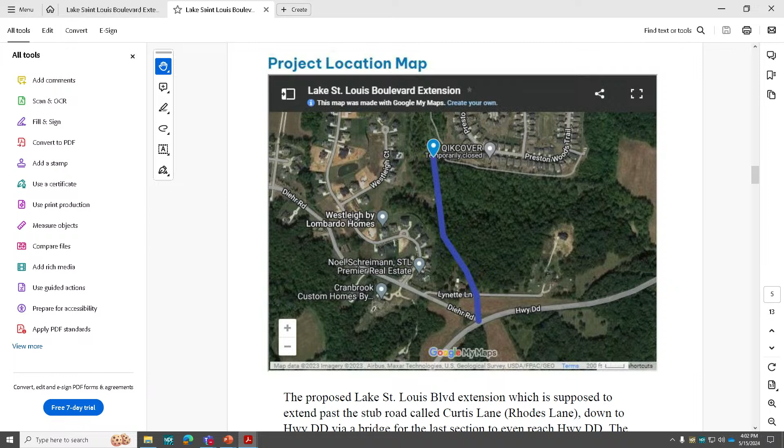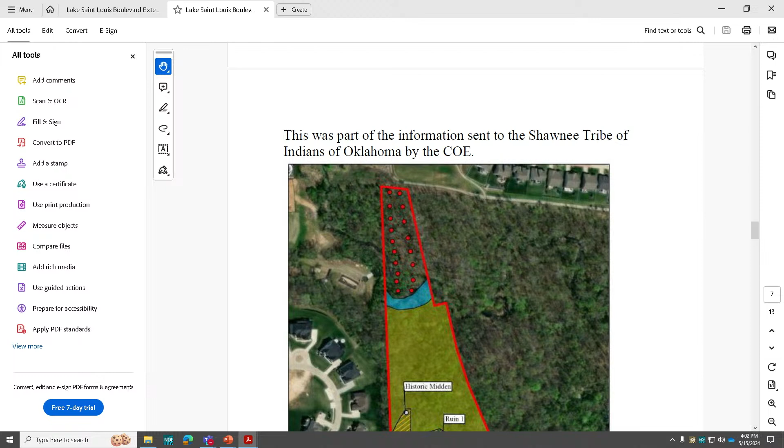I actually went to the Corps of Engineers and got some of their information about permits, which they haven't seen yet from the county. This is the original route, not the one that's supposed to be taken now. That's changed and moved over to Preston Woods even more. There's one I really want you to see - this is what the Corps sent. Do we have a copy of this? I can give you a copy. So this is what the Corps of Engineers actually sent to multiple Indian tribes. It shows on this drawing that there's historic buildings still on there, and other items.

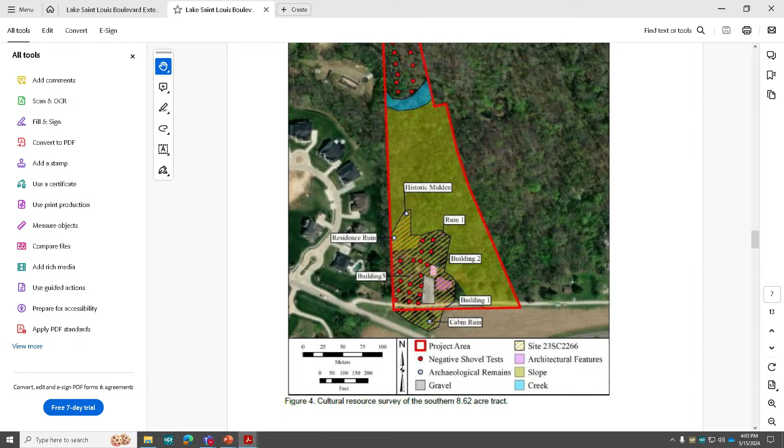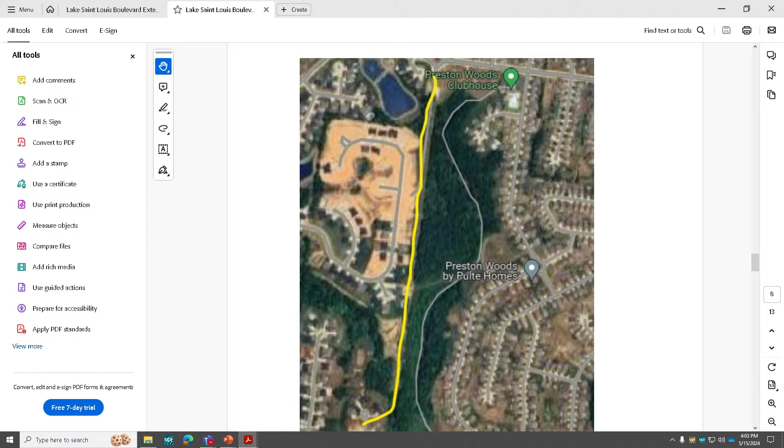That's the original route, using Curtis Lane, going down off of Paul Renaud. And even in between that lane, there's property that belongs to Preston Woods on the left side and on the east side - so east and west side, that property belongs to Preston Woods. This just shows you what I was talking about, where Curtis Lane originally was and where they're planning on putting the road, taking property away from the owner who is off Lynette Lane, off of Diehr Road.

When I get verification of the Eagles, I will let you guys know. Some things that the residents want you to know is that if they're going to do it, go ahead and do it, but they want trees to be replaced. Keep it as natural as it is now - it doesn't get mowed, it's not grass and sod put down, it's all natural, and so they want to keep that.

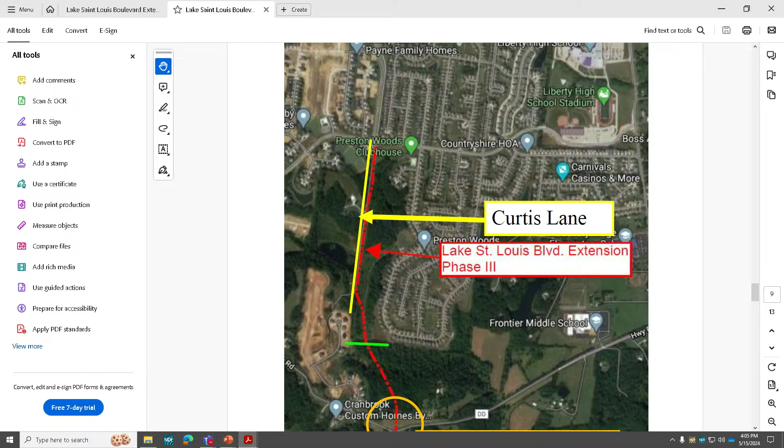Am I past time? Yep. Oh, sorry. So, have you talked to Lake St. Louis, and what are they saying? It's O'Fallon. Oh, I'm sorry, I thought you meant Lake St. Louis. That's okay. Yes, it's O'Fallon from Preston Woods, but when you get down to the bottom of Preston Wood where that green line is, that's St. Charles County, with the bridge going over a wetland and destroying the habitat that all these people paid for. Okay, any questions? Thank you very much. Thank you.

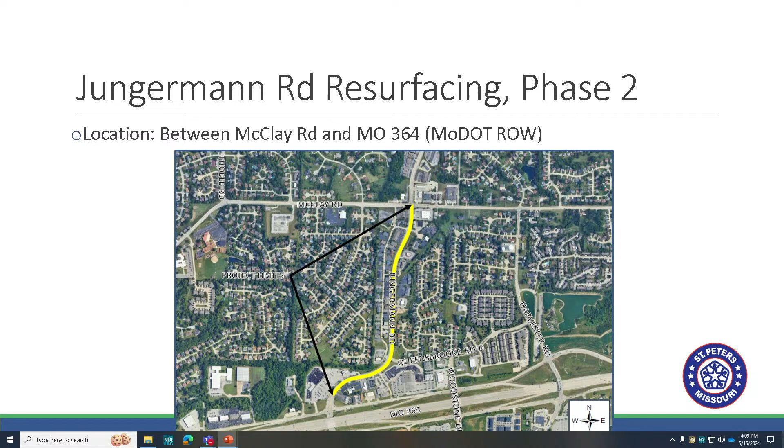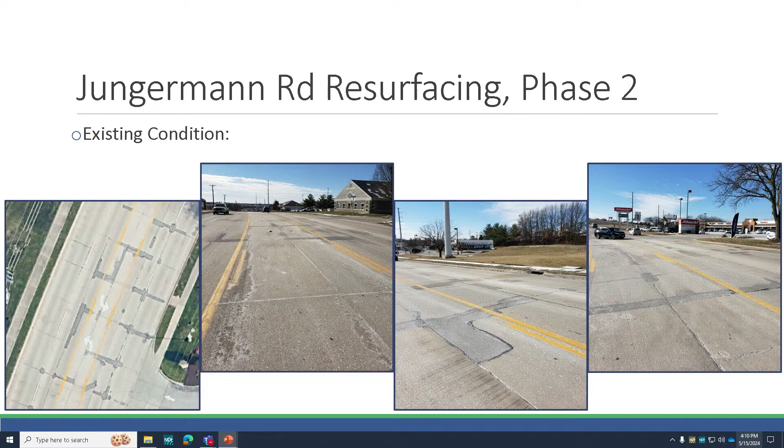The existing condition is basically, the city went in a few years back and did a large amount of partial depth pavement repair on the joints, just to get us by until we were able to come back to East West Gateway and apply for funding to do a larger project. So a lot of that joint repair is starting to fail. We've got some additional cracking in the slabs. The sidewalk is failing in multiple locations, with a lot of trip hazards. It doesn't meet ADA compliance. So those are things we want to address with this project.

The project scope: remove and replace all the damaged roadway slabs, diamond grind the roadway surface when we're finished to make it nice and smooth. We'll replace all the pavement marking and then install inlaid pavement markers. Remove and replace all the sidewalk, and then upgrade the pedestrian crossings at the signalized intersections, which would be Queensbrook and McClay.

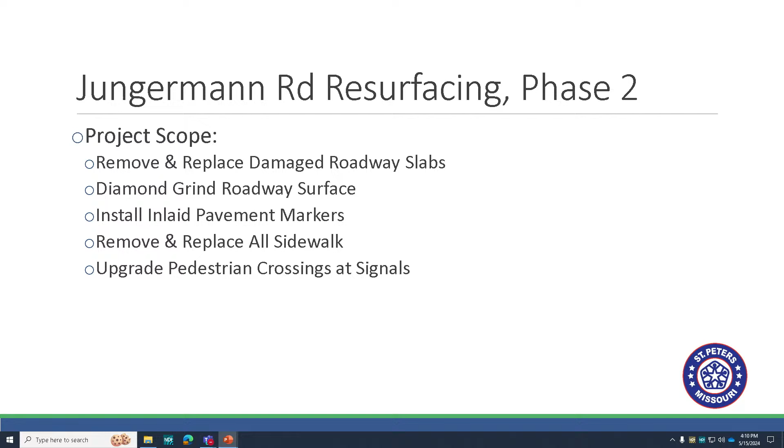Basically, we want to extend the useful life of the roadway, provide a nice smooth driving surface, improve the visibility of those lane lines during nighttime and wet conditions with the inlaid pavement markers. And then when we're finished, provide an ADA compliant path for bicyclists and pedestrians at the signalized crossings and throughout. So it's our standard resurfacing project that we typically do.

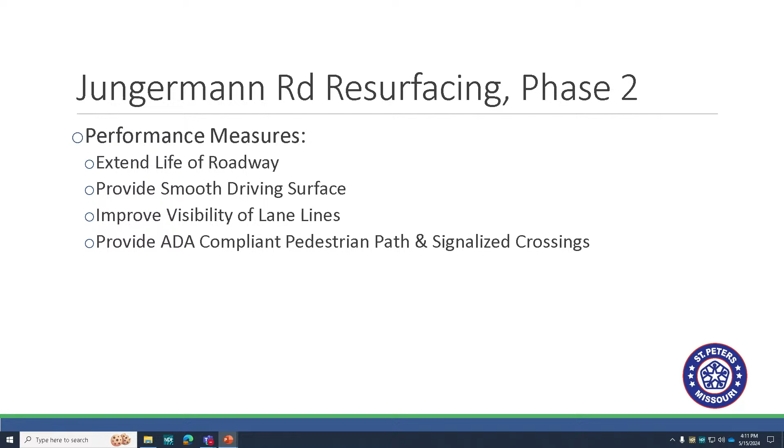Our second project is the Spencer Road Multi-Use Path Phase 1. This project is located along Mexico Road. It's going to start down at City Centre Park and extend up along the creek, along the north side of Mexico Road. It'll tie into a little piece of path that the city's Parks Department has already installed. Then on the north end of where they've stopped, we'll cross a creek, continue along the creek to the north, and then go along the south side of Executive Centre Parkway over to the Spencer Road intersection.

The existing condition of the path we have out there today, it's right there against traffic. It goes through one of our busier intersections in the city, the Spencer and Mexico intersection. So somebody on a bike or walking has to traverse that intersection, and that could be a safety issue. The idea is we can move those folks out of traffic, away from traffic, along a much nicer, more peaceful, less stressful route.

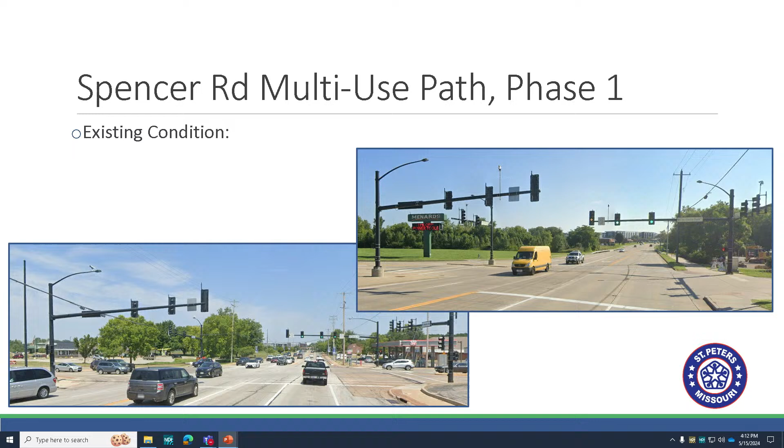Project scope is to install a new multi-use path, basically relocating the alignment of our existing Spencer Creek path, which will eventually become the Centennial Greenway. So once we complete multiple phases of upgrading this path, GRG is going to designate this as the Centennial Greenway. So this is one step in that direction. We'll upgrade the pedestrian crossings at the signals.

When you get to the bridge, yeah, I'll go back. Oh no, oh shoot, sorry, I was trying to go backwards and I'm just going forwards. Let me get there. Up on the, I don't know if you guys can see this. Oh no, I'm technologically challenged, guys. I'm sorry, this is not my, there we go.

Sorry, I was trying to point out to you, but up along Executive Centre Parkway, where there's a bridge for the creek crossing, instead of widening the bridge, we got a little creative. We're going to move the bridge barrier that exists over a few feet to widen our pedestrian path so that we don't have to widen the bridge. So a huge cost savings.

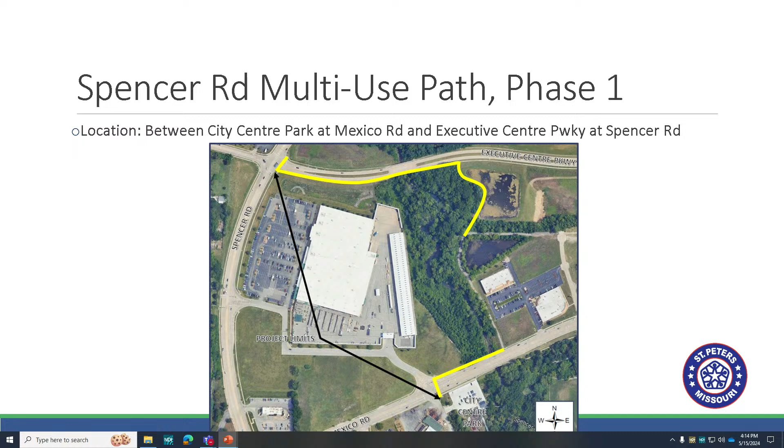Relocate that barrier, and then once we're finished with that, we'll put an epoxy polymer overlay across the bridge deck to fill in any of the divots and damage that might be created from removing that bridge barrier. And then also across the rest of the bridge deck to create a nice uniform surface and seal up any cracks that we have. And then replace the guardrail to bring it all up to current standards.

So the overall goal is to improve bike pedestrian safety. Again, move them away from traffic, get them out of the traveled way for vehicles as much as we can. Provide an ADA compliant bike ped path, and on the signalized crossings, provide a compliant path. Improve the visibility of the crosswalks. We'll put in the high-vis crosswalks, the big blocks, to try to bring more attention to those areas where a lot of bikes and pedestrians will be. And then extend the useful life of the deck of the bridge, create that uniform path surface, and provide compliant guardrail.

The overall project cost is $1.6 million. We only asked for 75% from East West Gateway because we were able to receive a TAP grant, which can only be used for bike ped improvements, and we wanted to add a couple of maintenance items to the project, so we were only able to get 75% federal funding, and we're asking for 80% of the local match, which is 20% of the project.

Did you secure that funding also? We did, yep. Congratulations, that's good.

And then the last project is the Mid-Rivers Mall Drive multi-use path. We've talked about this one a few times before, but it's located between Route N and MoDOT's right-of-way at 364, along the east side of the roadway.

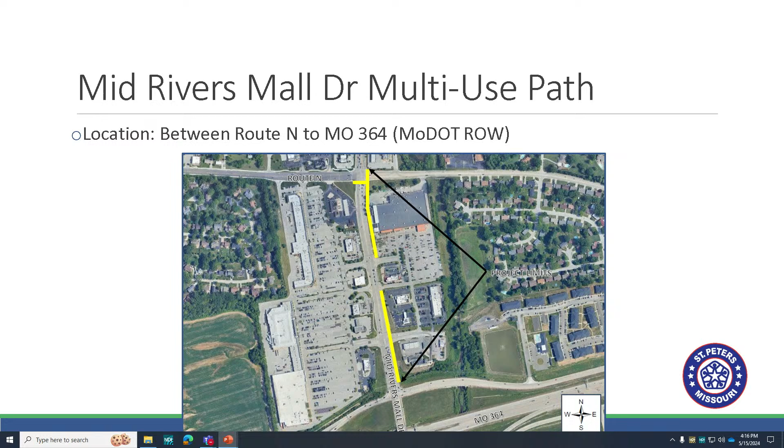Existing condition is it's not ADA compliant. We've got many curb ramps that aren't compliant. Push buttons aren't in the right locations to be ADA compliant. We've got some sump grates that create trip hazards because they're set back, and somebody could easily fall into the sump. Cross slopes are not meeting compliance. You can see they're gathering debris because they're kind of tilted.

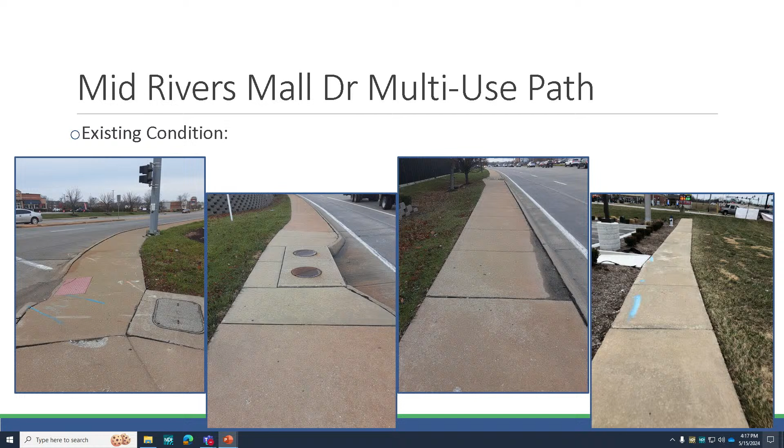And then on the south end of the project, down by Applebee's, the sidewalk just ends and there's a gap. So if somebody travels all the way down there, say, in a wheelchair, they're going to have to turn all the way back around, go back to the signal and back around. So it's really not safe for anyone.

So we would remove and replace the sidewalk with a 10-foot wide multi-use path, relocate any conflicting signal equipment at the Home Depot intersection, and at the Route N intersection there may be equipment that needs to be relocated. Relocate any conflicting utilities in the way, handholes, utility poles, and overall upgrade the pedestrian crossings at the signals. We would put in the high visibility crosswalk blocks also.

And this project will connect some adjoining paths. City of Cottleville has a path that runs along Route N. MoDOT has one that crosses over their bridge at 364, and it goes down to the south to the county park. This will kind of connect those dots.

We have an existing 8-foot path, if you want to call it that, on the west side of the road. It's not really a path, it's a shoulder. So people are kind of right there with traffic. Again, we want to get them away from traffic.

So we would improve the safety for bicyclists and pedestrians, provide a continuous path, get rid of that gap down by Applebee's, and then provide an ADA compliant path at the signalized crosswalks. Improve visibility of the crosswalks again with the high-vis crosswalk marking, and then connect to all those adjoining paths in the area.

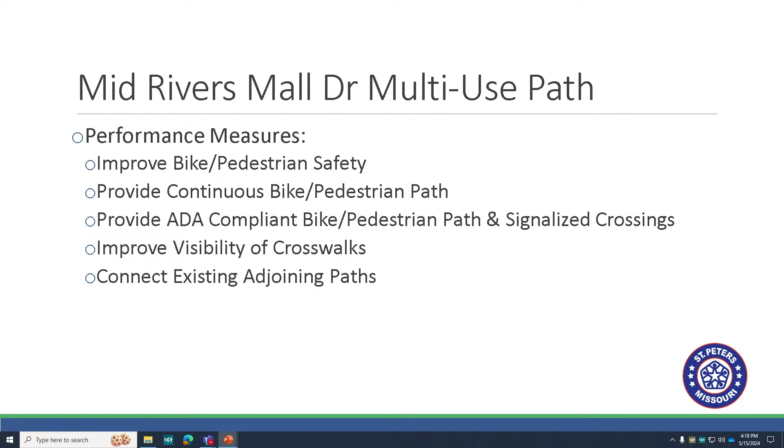We were successful in getting federal funding for this as well. Overall the project is pretty cheap, $800,000.

On the map, you can see there's that gap in front of Chick-fil-A, which the county has already funded through the right turn lane project into the Home Depot development. With that project, we're going to go ahead and install the path in that stretch, with city funding. So this does not include that little gap there, so it's $800,000.

We only asked for 65% federal funding, and we were able to receive that. We were trying to maximize our score to make sure that we got the project, so we were trying to keep our costs as low as possible, our federal ask as low as possible. So we're asking for an 80% local match, with county contribution for 28% of the project.

And then our priorities are Jungerman, Spencer, and Mid Rivers, in the order that I presented.

So, any questions? Congratulations on your application for federal funds, that's impressive. Thank you very much. Dan? Amanda, yes sir, I'm sorry to go back to this, on the Spencer Road funding breakdown, yes sir, you had mentioned there was another grant that you got.

In connection with this, no. So we applied for a TAP grant from East West Gateway, which we were able to get. That grant only covered, it didn't cover all the items on the project. It only covered all the pedestrian, bicyclist related projects. We want to do some additional bridge maintenance while we're out there.

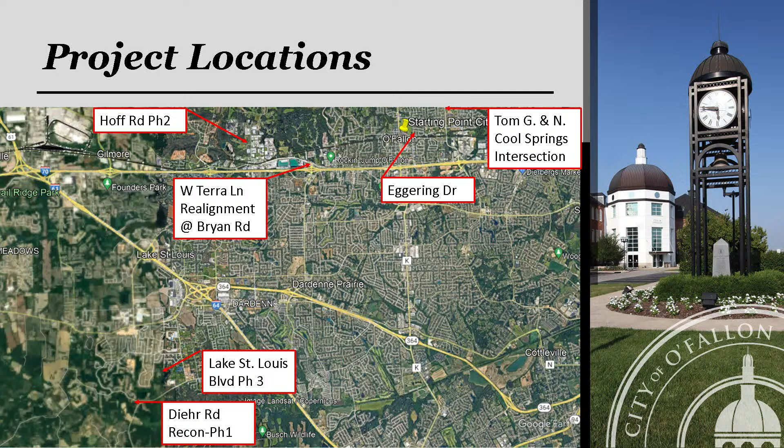As far as the project locations map, you can see where the general locations are. They're kind of clustered just a little bit north of I-70, and we have 2 clustered down in the southwest area of our city, which has very heavy development right now in that area.

We're looking at a way to improve traffic flow. This was a traffic flow application to you guys.

You can see in 2022 you guys awarded us some money just to get going on the design. At the time that was a pretty heavy number, and we have gotten into the design. We've got it all under contract essentially for the full design to get all the way out to construction. There's some things that may come up, but overall we think we've done pretty good.

Another part of that money from 2022 went to a very large public engagement effort that we did in 2023. That involved talking with all the residents and also the commercial properties along this corridor, to get this in front of them conceptually so they're at least aware of the project. So that's where some of the dollars went.

We finished up the conceptual phase and we're rolling into preliminary right now. We have submitted for federal funds in 2024 through the CMAQ program that East West Gateway puts out, and we've been recommended - not official yet until they get all the way through their process - but we've been recommended for half the cost of the project at this time. We were really excited about that. It makes it much more palatable for us when it comes to asking for county money.

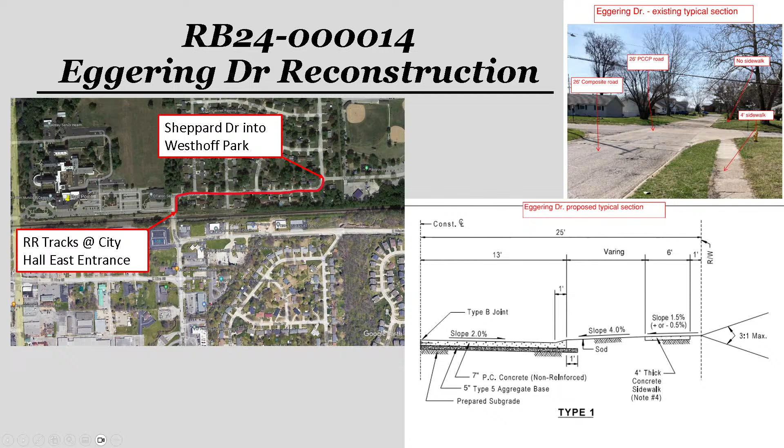Like I said, we'd be adding - it shows the sidewalk there in the bottom, in that top picture on the bottom right, but then there's segments that don't connect to anything, so we're extending it through there to get them to City Hall so people can get to our facility.

So again, I explained we had some federal funds we acquired back in 2022. And then for the county road board, the estimate of the project increased a little bit from last year because we added some GGL items to this, to get conduits and pole boxes through this, so we would have future connectivity of GGL from City Hall through to our Westhoff Park and through Westhoff Park over to TR Hughes. So we agreed, we've been talking with Amanda and their GGL representatives to make sure that we were at least getting that in.

One other thing with Eggering is that this is also planned to be a good connection to our future Sondern extension that would extend up to the north. It would extend north from Eggering and wrap into Main Street to help as a bypass to take some pressure off of Main Street. I just wanted to throw that out while I was still on it.

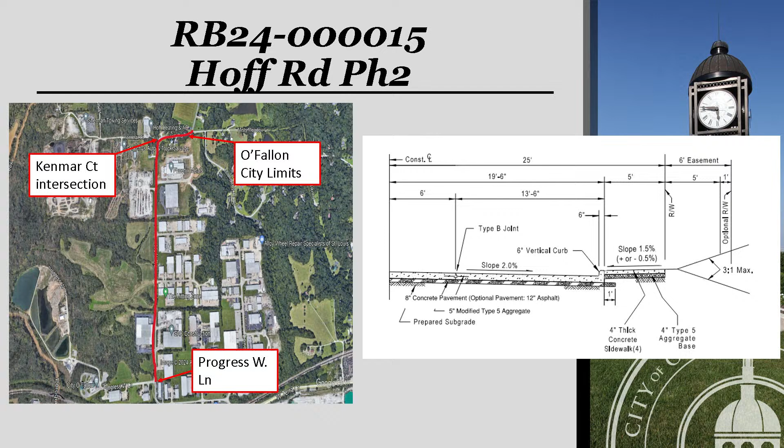Was Phase 1 3-lane, or did that just widen for the turn and all that? No, that actually just kind of stayed 2-lane and widened out a little bit for some shoulder. But this one, at that 90-degree turn, widens out right there because it ties into Progress West Lane, which goes to the environmental services where the dump is. The waste trucks all run through there all the time, and it's hard on the roads.

I wanted to show here that we already acquired $1.9 million in federal funds on this job. This is considered a new road application. Our total project cost is 3.6 million, which means when we take out the federal funds and what's remaining, we did 80/20 with the county, so our ask is a little less than 1.4 million for design, right-of-way, and construction.

We actually have Eggering, Hoff Road, and all three projects I've talked about working into design as of right now. We're moving forward with all of them, but this would be for design, right-of-way, and construction. I've already talked about the limits, so I won't go over the project description anymore. This is just how it breaks down with the ask we had from you guys this year.

The next one I want to talk about is Tom Ginnever and North Cool Springs. It's the intersection along Tom Ginnever, tucked right in between those three major components that provide all the traffic coming through that intersection. Right now it's basically an existing three-way stop sign, so the queues get pretty long, especially with school in session right now. That's ending soon so it will get better, but there's still a lot of traffic going through there.

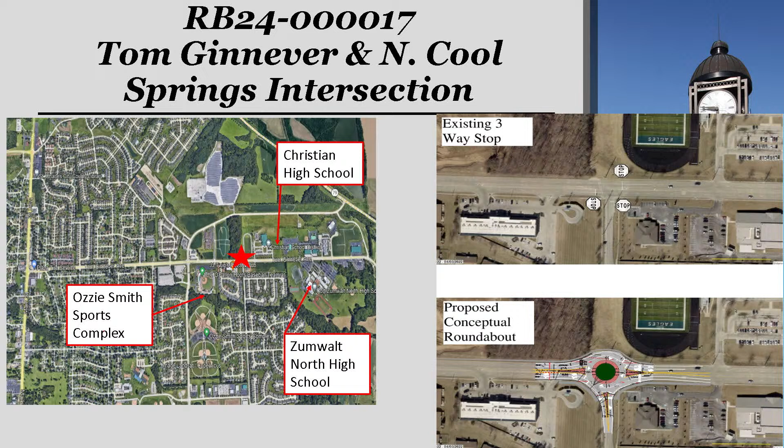We do have a roundabout proposed, essentially 2 lanes through the entire roundabout, to help keep pushing that traffic through because of all the school traffic mainly seen around there. It's also a major part of our Heritage and Freedom Fest traffic loading. So we feel this is going to be very beneficial in many ways for the city to improve this. This is just your typical section of the roundabout. We will have some connectivity through it with path sections, because there are kids walking to school and walking to Ozzie Smith and Carshield Field and all that kind of stuff.

So we do have some of that connectivity. Again, we do have federal funds secured for this, almost $1 million, not quite. So when we took that out and we have the remaining, our ask for county would be $555,000 for design, right-of-way, and construction to help support that.

You can see here that the proposed level of service for this roundabout improves everything to an A in both AM and PM peak times. It's currently one's like an E and one's like a C right now. Either way, we would be able to, and we've proven this through our federal funding, we have to do traffic studies, so we've already done that high-level evaluation to show that we do improve this to a level of service A when this is constructed.

All right, Diehr Road. I'm going to get into some that are a little bit more pricey now. But I wanted to show you what's going on in that southwest corner of the city of O'Fallon, where we're meeting up with multiple jurisdictions, with our Diehr Road Phase 1 project, which would be from Lynette Lane, just a little bit west of Highway DD. We're not going to get all the way to DD with our phase. We'll tie into whatever would work with the county's or MoDOT's changes to Highway DD's intersection. So we're leaving it a little bit short, and then we extend over to Longgate.

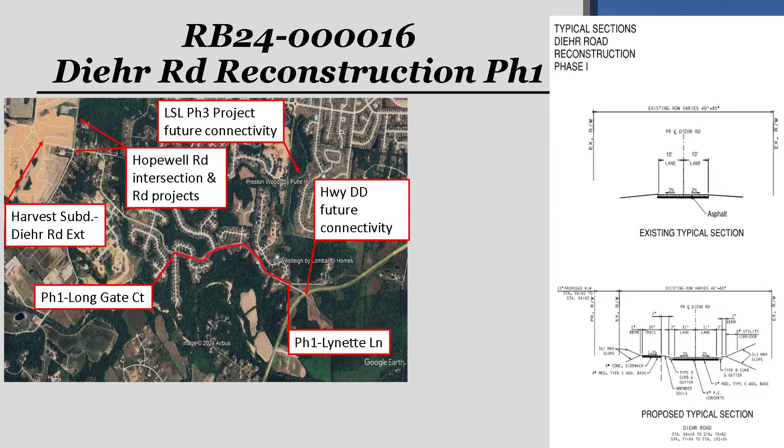So as you can see, we did receive county funds from you guys in 2022. What that went towards was the phase 1 design, because we weren't quite sure how this project was going to unfold. We didn't think we were going to do the whole corridor, but we wanted to look at it and evaluate it. We also did a very heavy public engagement effort where we've already had one public meeting, had a great turnout, got a lot of good comments. We've been kind of playing with the alignments and tweaking things as best we can to accommodate whatever we did hear from the residents, but at the same time we have to make sure we do what's best for our traffic.

Federal funds have not been acquired or submitted for at this time. We're looking at trying to reclassify this roadway and see if that helps us with some federal funding in the future. So I'm not saying we won't apply, but we just haven't yet. We're working with Amanda's group on that too.

As far as the county road board request, the estimated project as of right now, according to our phase 1 preliminary designs, is about 6.6 or a little less. So we would be doing an 80-20 split. That includes right-of-way and construction, because design is already taken care of. This would be phase 1, obviously, of the multi-phase project; when we move into phase 2 we'll get into that later, but we're more focused on just getting phase 1 going at this time. It involves basically a new 2-lane roadway. We do plan on having a roundabout at the Paul Renaud intersection. That's always getting tweaked right now for our preliminary design.

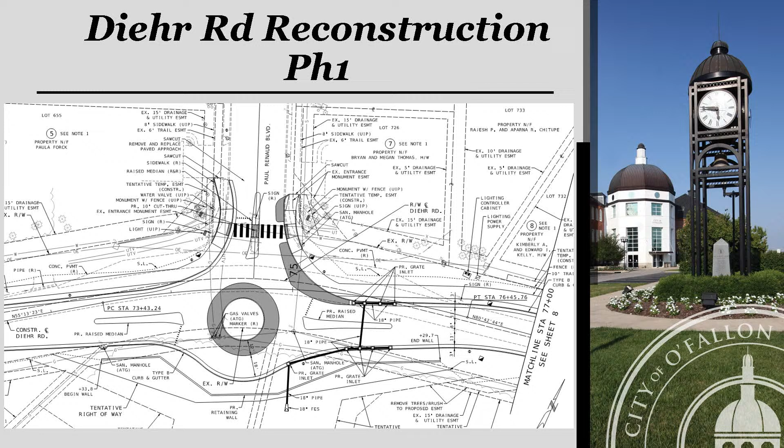This is just a high level. This was an early preliminary of the roundabout at Paul Renaud. Like I said, we're tweaking it. We're trying to minimize the footprint, but make sure we don't impact anything negatively as far as truck or car traffic through this—we have to make sure we can get all traffic through. So we're still playing with it, but I wanted to show that as a slide for now. This is subject to change, so take it with a grain of salt, just to have it out there for you. And again, this is our ask of 80-20 for our right-of-way and construction, utility relocations, things like that for that project.

As far as county funds, we received, I think in '22, about $240,000 for design and right-of-way. Unfortunately, to date, our design costs have crept up because of some unforeseen things we've run into with environmental needs and getting some approvals through. Alignments have been requested for us to look at, so we had to do some alignment evaluations. One thing we've done is already reduce the typical roadway section in an effort to reduce costs on this project.

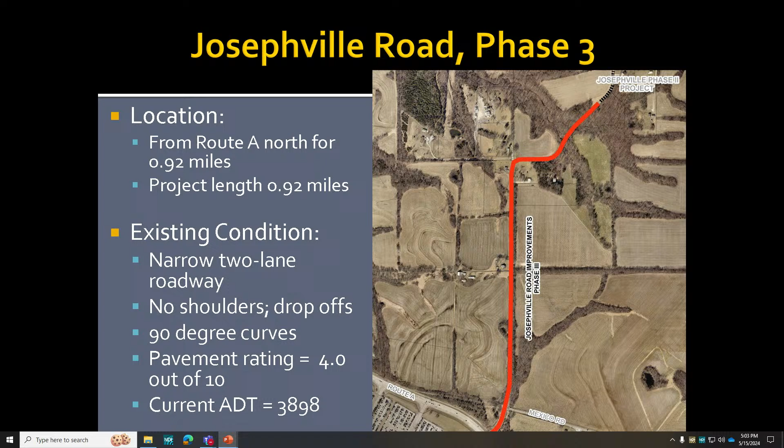It has almost twice the ADT of the other sections, so we're about 3,900 vehicles a day. The pavement rating was similar to all the others, so a 4 out of 10, a road definitely in need of some improvement. Now these are just like the rest of Josephville Road, a narrow 2-lane road. There's no shoulders out there. We obviously have drop-offs, obstructions, etc. And this one has some 90-degree turns just like the other phases did.

So our proposed section on this one is going to be 11-foot wide lanes, which is what's there now, but adding a 5-foot shoulder on both sides and then improving the ditches. So pushing the vegetation back, improving the drainage, and making it a little safer if, unfortunately, necessary you run off the road. You're not going to go straight into a tree or a culvert head wall or something.

There is a note on the bottom I should point out. It says 12-foot lanes and 4-foot shoulders. That's actually what we proposed on the other 2 projects, so I kind of stole this exhibit from those, but those projects are also being changed to 11-foot lanes and 5-foot shoulders, because 5-foot is considered better for usage of bicyclists.

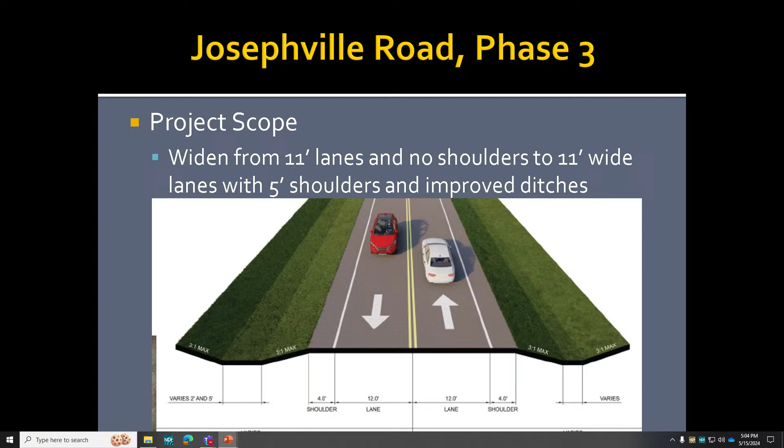All right, a financial plan on this one. As I mentioned, it is recommended for federal funding in the amount of $1.3 million. So we come to you for the remainder of funding to start design in '25, acquire right-of-way in '26, and then it's currently set up for construction in 2028, and we would accelerate to '27 if possible. Right now, that's just how the Fed said, we couldn't start this project before '28. So it's roughly just under $2 million from the road board and 1.3 million federal is the request.

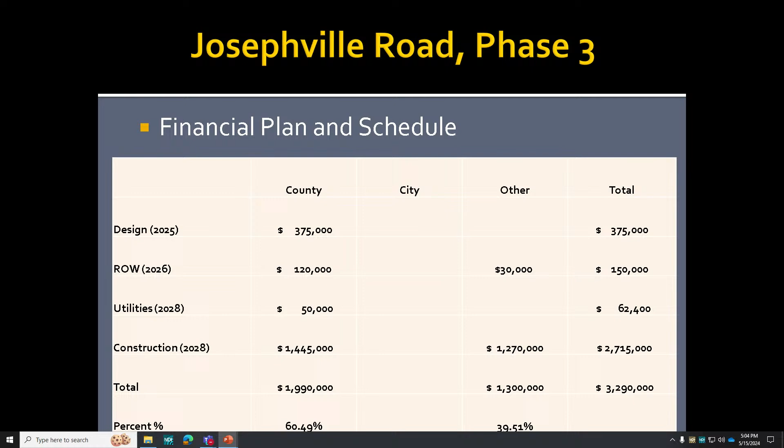All right, now I have 3 projects for you. They're all going to seem pretty similar. They're all bridge replacements. We did 3 with you last year, and we have 3 more this year.

The first is Oberhelman Road Bridge. This is in far western, almost southwestern St. Charles County, not terribly far off Highway T, south of Forest Hill Road. This project would just replace the bridge in place. The road will be closed with a detour, and I'll have it done in 2 or 3 months.

The bridge rating percentage-wise isn't that bad, but as far as structurally deficient, the substructure condition is a 4. Whenever you hit a 4 or less on a 1 to 10 scale, it becomes eligible for federal funding, so we've been targeting those. Once we do these 3 bridges, we'll be back to where we don't have any considered deficient bridges in the county on our system.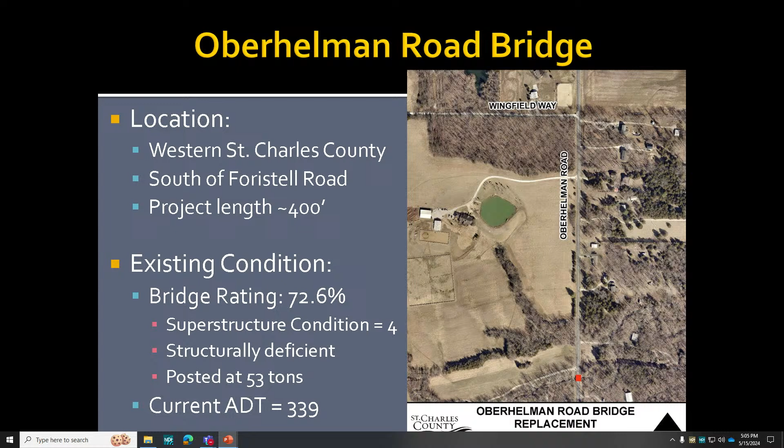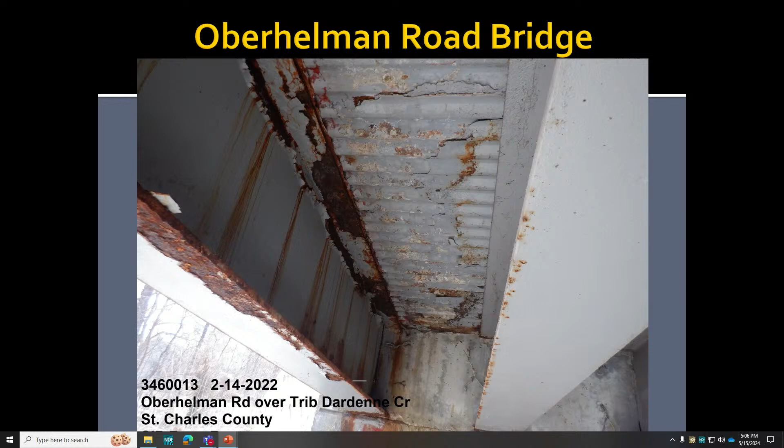This one does have a load posting, 53 tons. It's a low ADT, just a little north-south connector. This picture shows what we have going on, which is like most of these bridges - a lot of rusting typically on the outside girders, but we also have some underneath, some infiltration through the deck, which is what makes it a superstructure problem.

So cost on this one, it's not exactly an 80-20, but it's kind of close. The difference is we usually don't ask for federal funding in design because it just slows things down. So we do an 80-20 split on the rest, with the right-of-way and construction costs. We have $604,000 in federal funds recommended, and we need an extra $276,000 to do this project.

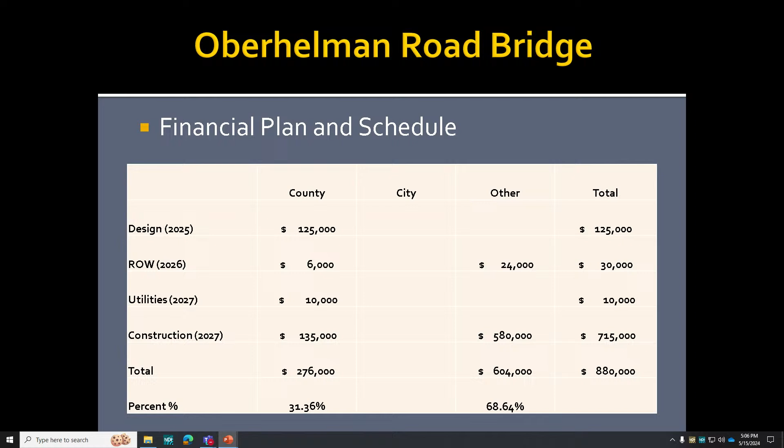The next one I have for you is Schwede Road Bridge. We recently worked on that curve on Schwede Road - in the picture you can perhaps see just north of the bridge, in between the trees, where the road used to be, and we smoothed that out. Now the bridge is to the point it needs to be replaced, so there won't be a whole lot of road work on this one either.

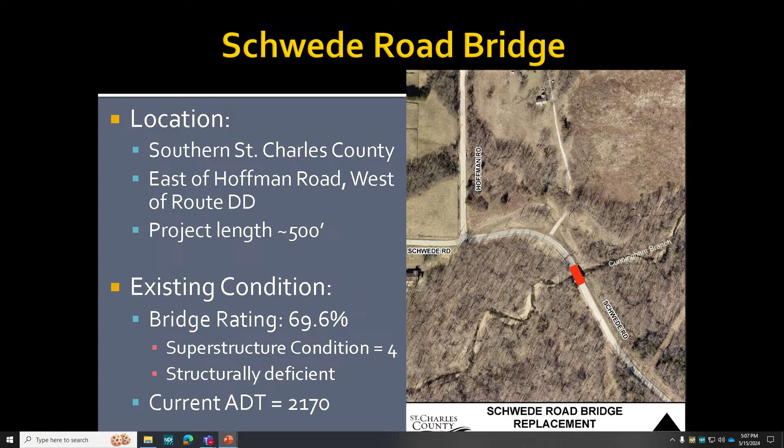The bridge rating was about the same - also superstructure of 4, structurally deficient. We have an ADT around 2,000. The pictures are going to look almost exactly the same as the other one, and what we're looking at is also a similar cost, 80-20 on right-of-way and construction. We got $644,000 recommended federally, and we're looking for $286,000 on this one.

And the last bridge I have for you is Sneak Road. This is a little bit farther west than Oberhelman, almost out of the county - it's 1,500 feet east of Route T. This one is another straight road replacement: close the road, replace the bridge in place.

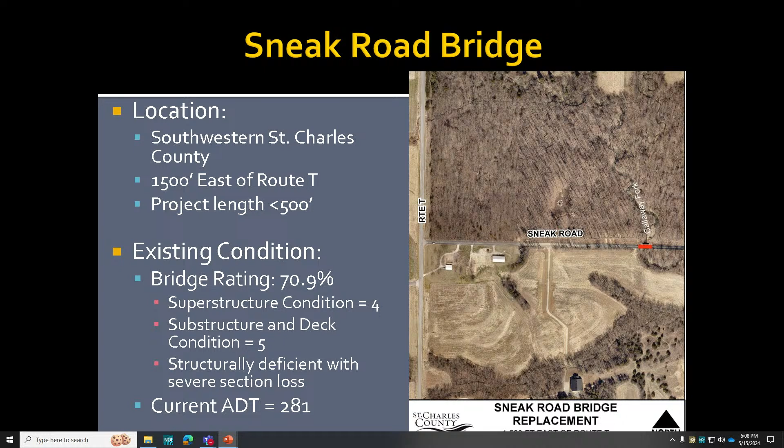Similar bridge rating percentage, but you'll see from the pictures it actually looks a whole lot worse. It has substructure problems as well as superstructure problems. It's structurally deficient, and they note severe section loss - I'll show you a picture of what that looks like in a second. It's another pretty low ADT road, but the bridge is not looking particularly good on the outer girders.

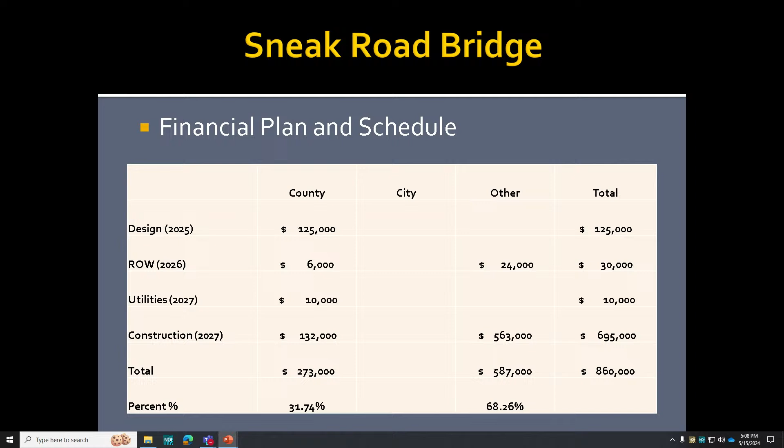So this one, again, very similar cost - $587,000 recommended federally, $273,000 is what we are asking for on this project. And that is everything I have for you today.

You had in the package Salt River Road multi-use path? Correct - that was not recommended for funding, so we've decided we're either going to try for TAP funds or try again next year. Thank you. Any questions? All right, very good, thank you very much.

Any new business this evening?

As was noted, we did really well on federal funds this year. Some of the cities lag a year - I think St. Peters got most of theirs last year in last year's TAP cycle. We got, sorry, let me check my list here - we got almost 25% of all federal funding for the Missouri side of the region, so St. Louis City got 27.8% and St. Louis County got 27.9%, just for comparison. So we were really happy with how we did, and have a lot of good stuff coming. I think everybody's concerned about budget - I did put in some numbers this afternoon to try to see where we are, but I haven't checked anything, haven't done any major checking in and looking through things.